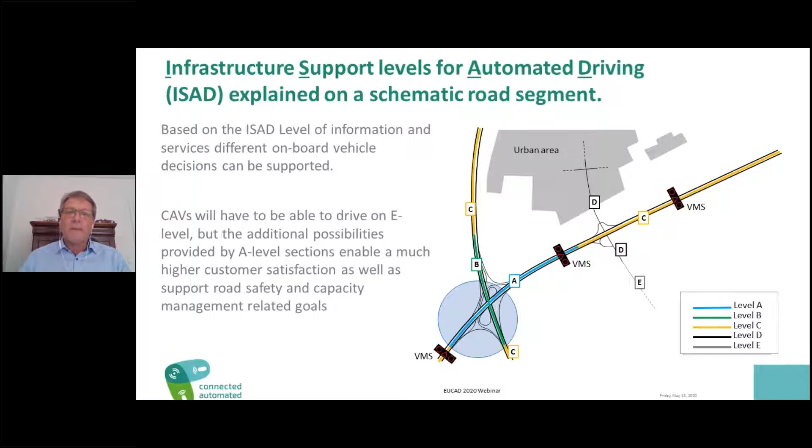And now we have the link between all of them, which is the ISAD levels, which help the car make, let's say, a driving strategy which is correct, which fulfills all the laws, but also helps the traffic flow. So this is the first aspect of having maybe a link to the fall webinar where we discuss the effect of automation on efficiency and other things. I also don't want to go into the details here.

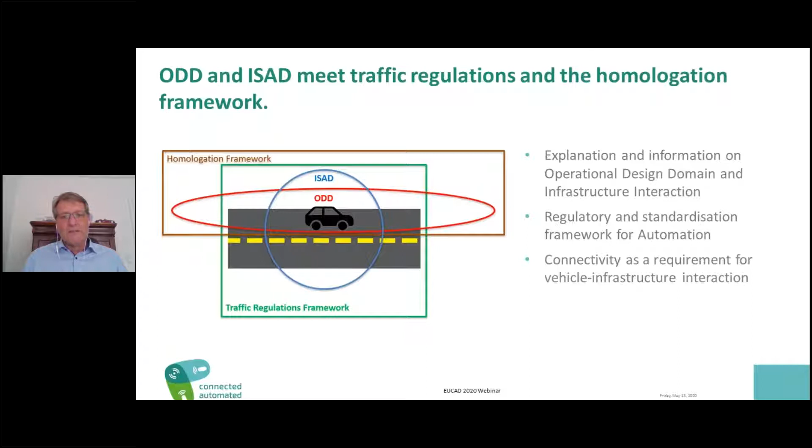Or not member states, but countries who are participating in the UNECE process. Saying this, it's clear that highway use cases are completely different than urban use cases. So what we expect is the first generation of level 3 cars on highways in the 2020s, and even level 4 on highways may be earlier than level 4 in urban areas, because the speed,

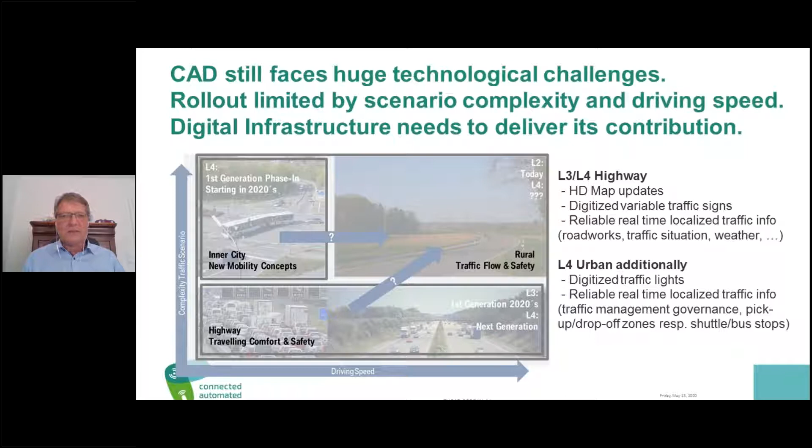On the next slide, we have a Slido question again. So please take your Slido tool again, be it on the laptop or on the phone. So which digital infrastructure measures do you see coming up? And you have this multiple choice. You can do that, and after my presentation we will look at the results.

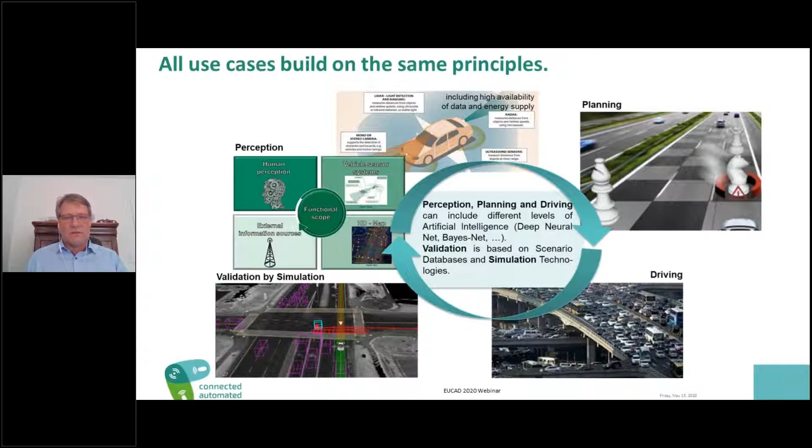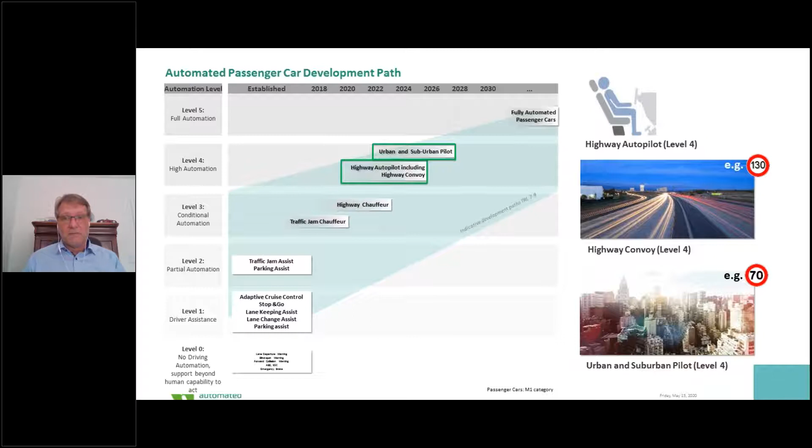As you have seen in my other charts, most of the technological approaches, what needs to be done, what needs to be developed, is there. So the idea how it could work in the future is there, but it's a lot of work and a lot of research questions in detail to be solved before it comes to the road and is industrialized, especially.

So this is again one of the big steps where infrastructure could help a lot, because we will see that there are hub-to-hub road nets which are quite small, but if they have a strong infrastructure with a high ISAD level, then there will be many more use cases, very quickly established. So this is also a very good chance to speed up automated truck transport.

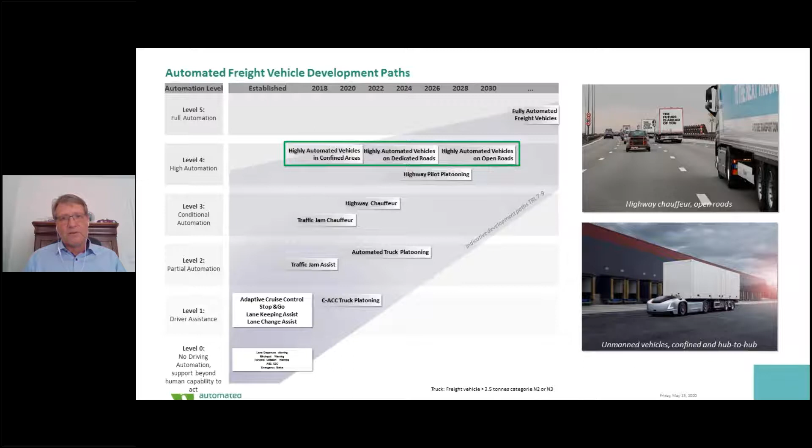So I think this is the key solution to make cities more livable and also address all the targets which are set from the political side for this research work which we are executing here in the European Union. So this was it from my side as an input. And now we can look at the poll results, which we had in the middle of my presentation.

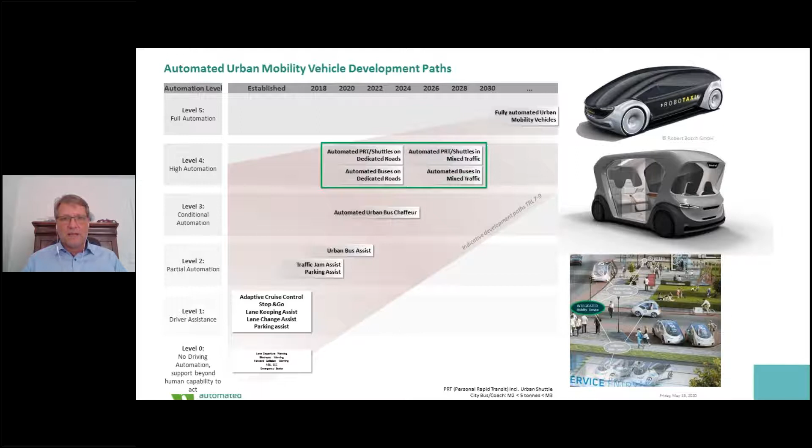Okay, so we had 46 participants in this poll, it's just going on again. That's nice. Thank you. Some others have mentioned what they see there, and we will collect all this and afterwards look at it and refer to it. And you have also the question if you have mentioned others here. Okay, these are the direct others, but I think that's enough for the moment.

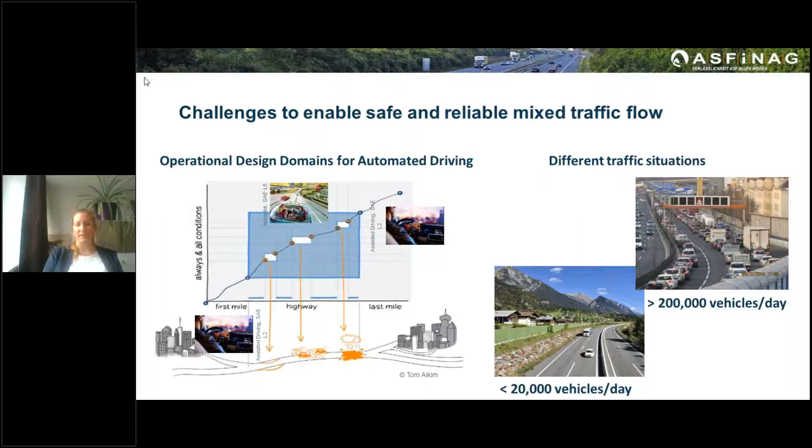So on the next slide, you see what we have in mind. With the next click, you will see that, for example, local roadwork zones, which are not planned so far, I mean, we are planning it, but which are just happening on a daily basis, where we have to close lanes, might be a situation where a vehicle needs to hand over the driving responsibility to the human driver. Or another example for losing this operational design domain could be temporary adverse weather conditions.

So by the next click, what we have to consider right now is, do those new generation of vehicles really have the same information, or do they need more information to do their maneuver planning? So we have to assume that a machine needs a different kind of information than the human driver needs, because the human is adapted to evaluate different situations. So here's the question, what kind of infrastructure, but also what kind of digitalized infrastructure elements could be necessary to still have reliable and safe traffic?

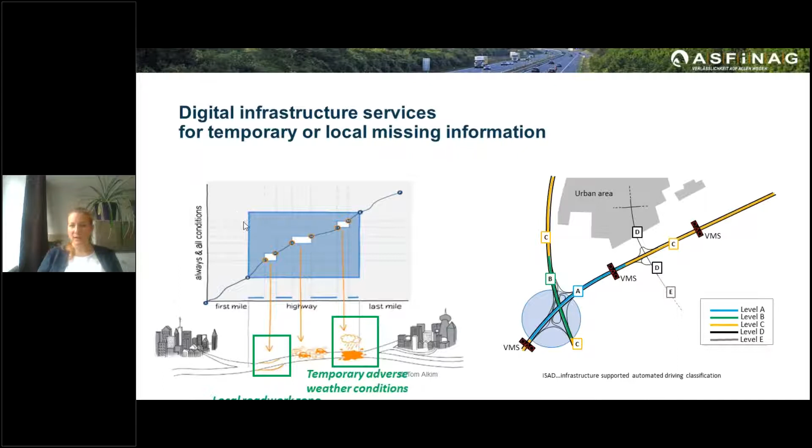So I think for the next slide, I will take over the control of the slides. And I hope you can right now see my slides. So what you can see here is the... Jacqueline, we don't see your slide. Okay, thank you very much. Do you see my slides now? Yes. Perfect. Thank you very much.

So what you see here is the classification. We have structured the scheme in different classes, starting with E, where the vehicle needs to really recognize the road geometry and all different information on its own. And we level up till the highest level, where the infrastructure is really in a kind of cooperative mode and supports the vehicle by maneuvering through difficult situations. So I would be curious about the poll result, what services you see, so that we can analyze in which kind of class we can order them.

But what is more interesting and on a kind of real-time traffic information is to get all those messages, like the incident, that there's a broken vehicle, that there is a roadwork warning or zone right before you, or that there is, due to this traffic management of organizing an incident or a roadwork zone, also limitation of speed. We could have this direct communication in real time to the cars. And that's also why ASFINAG invests in this technology of real-time direct communication to indicate, on the one hand, really road safety relevant information.

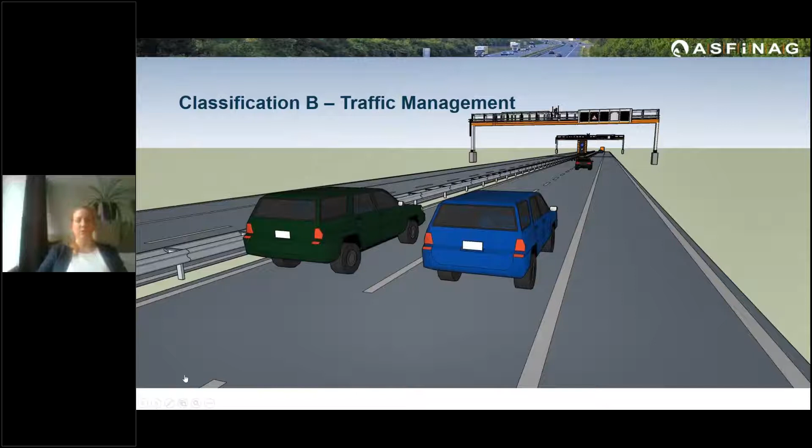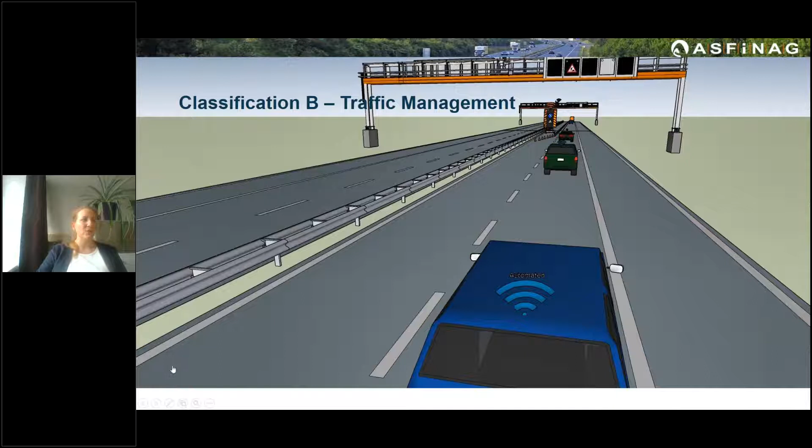On the other hand, and I hope it works for you, is that with this direct communication, you also open, it's a different flavor, but you open another possibility of communicating to cars. We assume that we will have, for the first years, connected cars, automated cars, but also normal vehicles. So the whole orchestration of difficult traffic situations could be a little bit facilitated by sending recommendations for lane changes, for sending information about the distance gap between two cars, so to support really the safe maneuvering of cars in specific traffic situations. So that will not be needed everywhere, but at specific sections of the network that could be relevant.

And for the highest level of this classification, we assume even to have in real time the full knowledge about traffic situations and about everything happening on specific parts of the network. So what you can see here is when we just invest a lot in infrastructure and generate a full scope of the traffic situation, we could be able to send over a complete object detection list where we have the car classification, the speed and the heading of the car, and so get out a kind of overall perception from the infrastructure to support the vehicle's perception with its limited sensor distance capabilities. Or we could also automatically detect some broken down vehicles, which could also be enabled by some kind of direct communication.

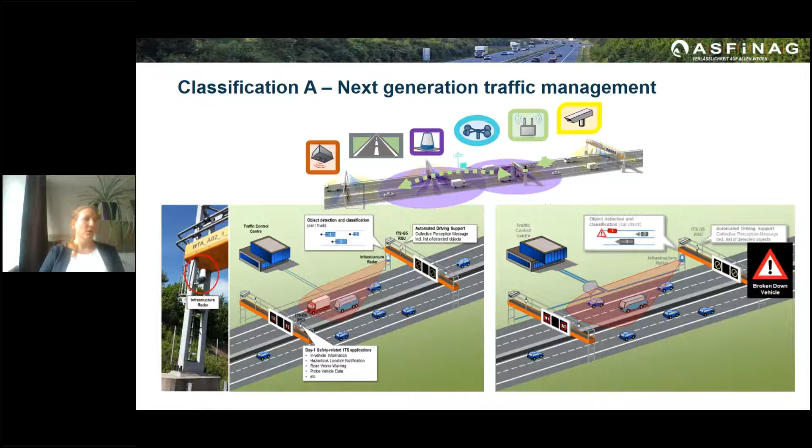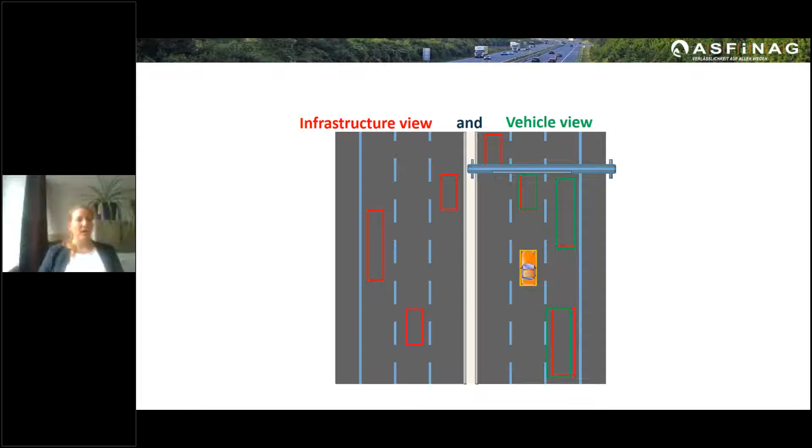So to share this thought, it's about that the infrastructure sees overall the whole traffic, while the vehicle only sees what it can see with its own detectors and sensors. So by combining both, we would just really increase the vehicle's perception. And that could also lead, if we have really a full equipment of roads, to guiding vehicles through difficult situations. But I also have to mention that it will not work to have a full equipment of infrastructure everywhere. It still needs to be investigated which kind of services are really required to enable a safe and efficient automated driving composition of the full traffic, and of course to identify really the most important parts of the infrastructure where this infrastructure support really has an added value.

And of course, it's a matter, like the question before, of financing. That's why the scheme was introduced 2 years ago, and now is trying to really have some spotlights on different services which could enable and facilitate the introduction of automated vehicles on our roads. So to close my short talk, I would be really interested in which services should be further developed within the next year. So what do you see should be the service Europe should work on to facilitate and fasten a little bit the market entrance?

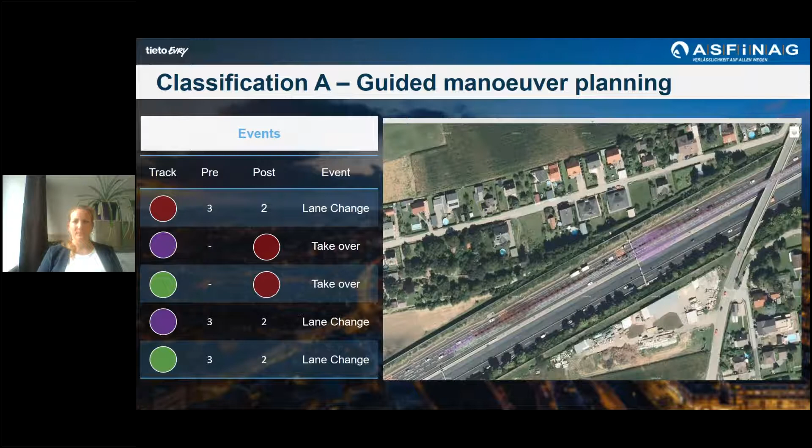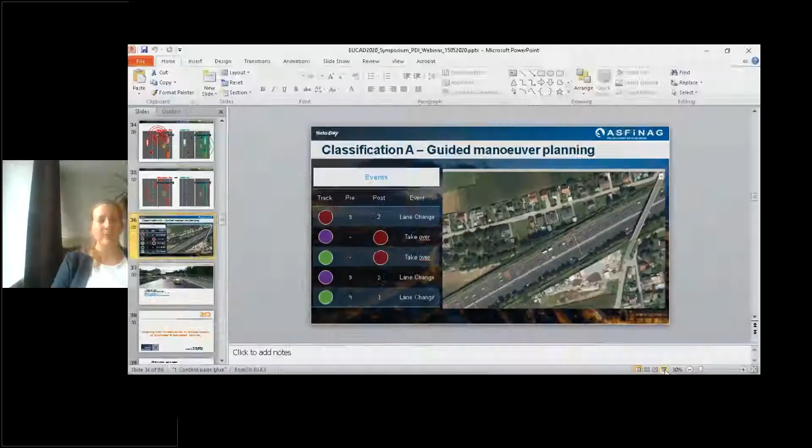Okay, maybe I go to the questions which you already entered. There I see the first question: do you expect road operators will provide HD map information directly to road users? So far, what I see, there are first projects ongoing where a kind of layer information is provided, but in a sense of a topology point cloud. So will it be real time? I think it will not be a kind of HD map, but it will be more like some additional layer information.

There was another interesting question about the digital representation of traffic rules, if they are needed as well, and the federation of the NAPs. I mean, there are different flavors of the national access points. So there should be a common discussion. I think the discussion is ongoing about how to really digitalize the traffic rules.

So I will answer a last question, to close and then hand over to Thierry: for the ISAD classification, have you identified a relation between the support provided at each level and the allowed behavior of CAVs and the potential CCAM services that can take place? So far, we did not consider to really have a one-to-one relation between the ISAD classification and SAE levels, so levels of automation of vehicles.

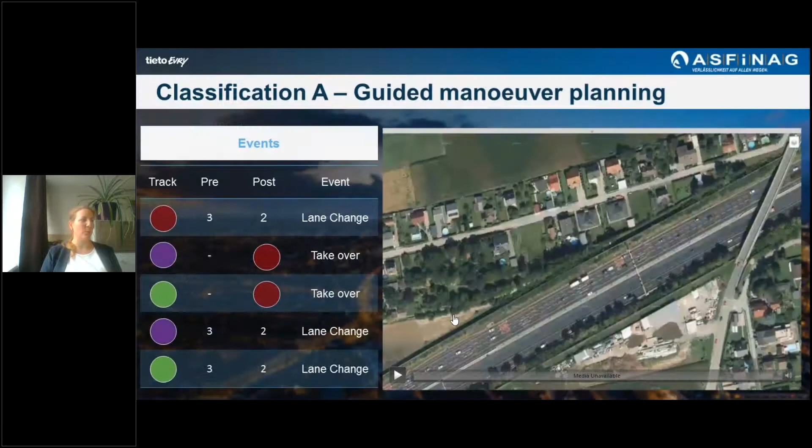All right, so I'm going to mention a few things. My name is Thierry Goger. I'm the Secretary General of FEHRL. The adaptation of road infrastructure to the deployment of connected and automated vehicles has been in the air for a while, also within FEHRL, which is an association of research centers focusing on road infrastructure research. In the next slide, you'll see that we've been looking at roadmaps already about 5-6 years ago, trying to move on to the next generation of road, in which one of the main pillars is the automated road. So roads which are able to monitor their own conditions, but also support the deployment of automated vehicles.

In the next slides, we can also show that this effort made on the road has been further detailed and worked with the other modes of transport, from the work done on the Forever Open Road program, put forward to the 4x4 open and integrated transport infrastructure, looking at the road, the rail, the river, and the runways, not only at the technology side, but also infrastructure aspects, governance, and the shared customers. You'll need to click a few times to go to the next slide, please.

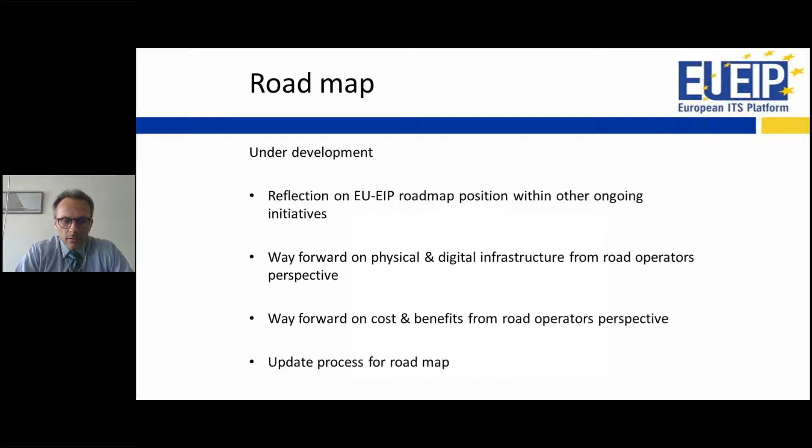Well, this was not the only one. We have already in the next slide, so we had a few presentations already, a few words mentioned earlier by other projects. So I will also probably focus mostly on CoEXist. So anyway, within the workshop, beside the main framework, what we notice is that within the research done at the moment, some achievements and lessons learned can already be taken from infrastructure simulation or simulation of traffic, including CAVs, which is a very new feature now implemented in traffic modeling.

Still, there is a big responsibility in this modeling on the modeler to define the assumptions, how the vehicle should or will behave. And that's an important warning to address at first. What we noticed in CoEXist, where indeed the main work was to build this new modeling integrating CAVs, is that the driving logics are at the heart of consideration, and clearly, if there is already much research ongoing, there is a high need to clarify and define very clearly the driving logic, so that the model will represent the reality.

The other aspect that we can highlight is the cities' expectation management. They have probably lost a bit of the hype around CAVs, and now we are more in the step of learning how to prepare for the planning, considering that all uncertainty requires a structured way of assessing future scenarios, and that's something that we have tried to do in the CoEXist framework.

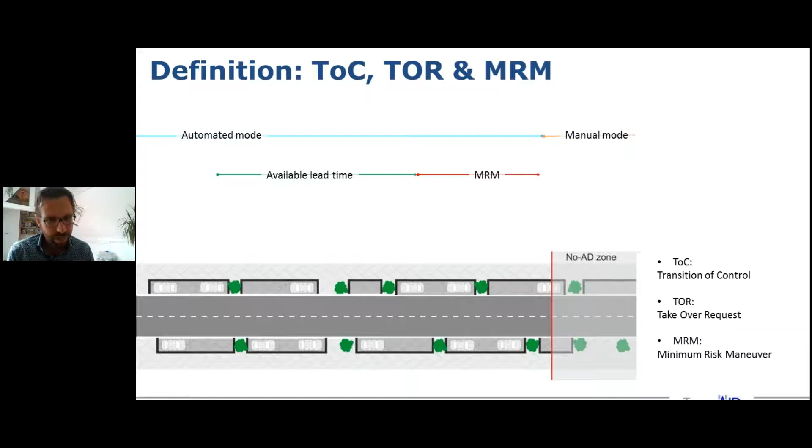On managing ODDs. Fortunately, this figure was explained by one of the previous presenters. It shows that an ODD has boundaries and gaps, and therefore transition of control may happen frequently. And when it does, there is the risk of reduced driving performance in case the human takes over, or a minimum risk maneuver in case there is no transition of control when the driver does not respond.

And in our project, we took this as a starting point. The vehicle is unable to solve the situation ahead, and then considering the scenario where this happens to several vehicles systematically, which has a considerable effect on traffic flow, traffic safety, and other indicators. Next slide, please.

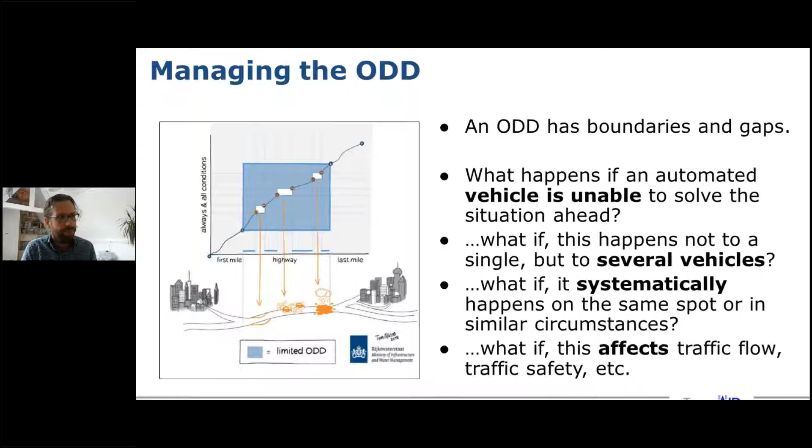Meanwhile, as a question in Slido, you can answer this question: what do you expect? What do you expect a CAV will do in case of a minimum risk maneuver? In the meantime, I would say I can proceed with my presentation.

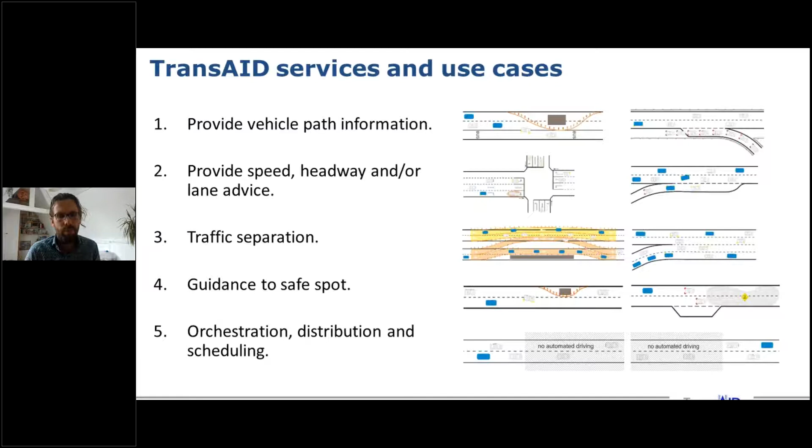So on Slido, you can again answer a question: which service for infrastructure assisted driving do you consider to be most realistic out of these 5 that I presented? Next slide, please.

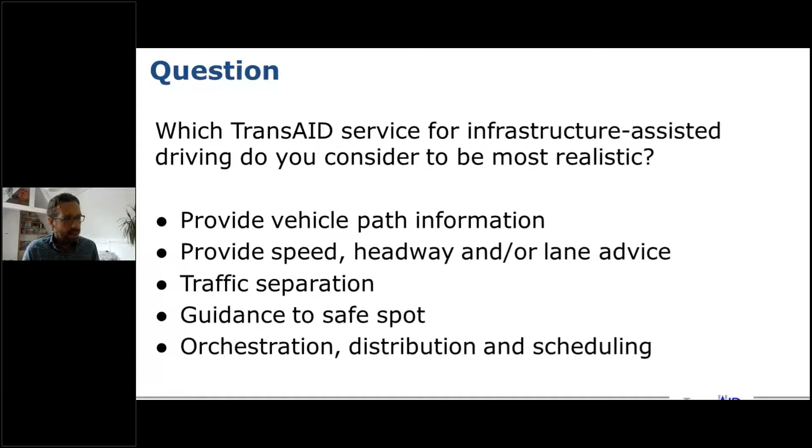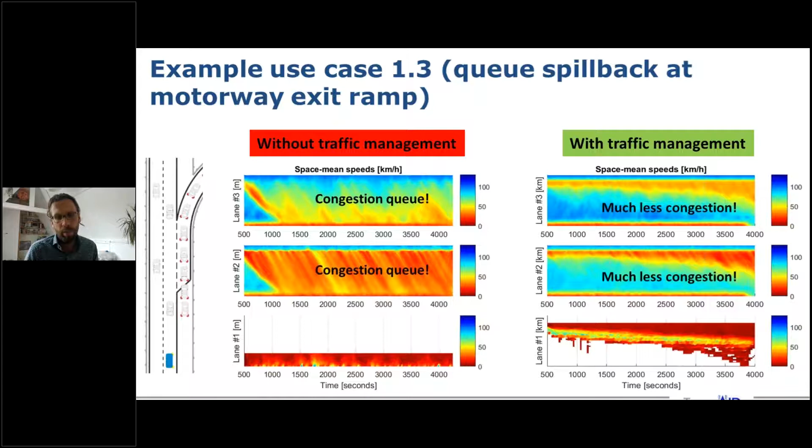And if we implement that measure, you can see a clear benefit on both lanes, as you would also expect with normal traffic, of course, if we do that today. But it makes a big difference implementing a measure like this. Next slide, please.

Since we're approaching the end of our project, we are also working on the exploitation activities to see how what we've developed can be implemented and operationalized with relevant stakeholders, for example, road authorities and OEMs. Essentially, what we're doing is linking traffic management with fleet management. So we're linking the world of traffic managers and road authorities with the world of fleet managers and OEMs.

And this cooperation is not natural, as we have seen and learned in the past years, but there is a sense of trust that is required. And there is a need of understanding, and especially a need to align measures that are implemented on traffic, on vehicles, on the road. So what we've been working on is the definition of an intermediary service that is a single point of access for both these entities and can interact with traffic through traffic information and traffic measures.

An advantage is that this intermediary service can also be applied across road authority borders, including those that do not possess a traffic management center, which is very common in rural areas, smaller cities around the world. Next slide, please.